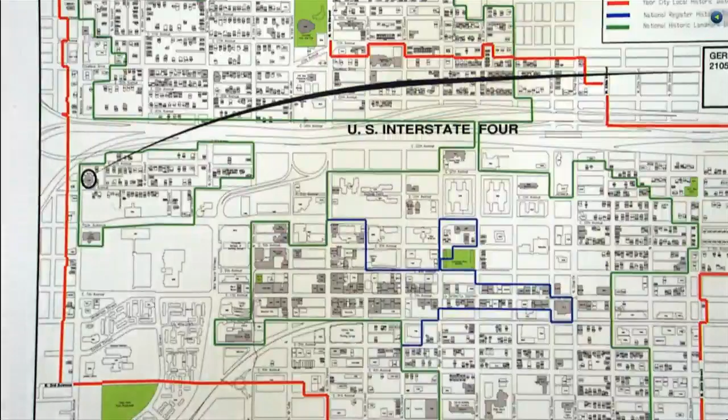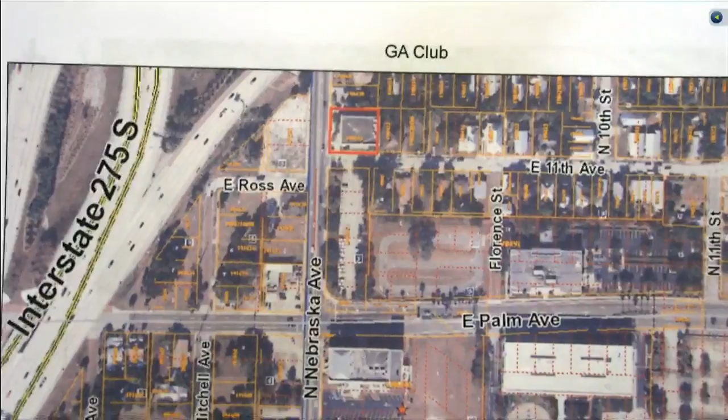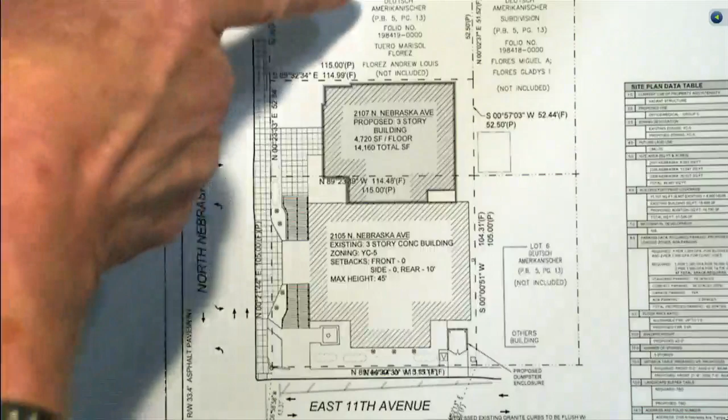And here is the site plan of the building. Here's the historic building, the German-American Club itself, and then here is an addition, which, as Ron mentioned to you, you have reviewed previously and approved. We will be going over the exterior as well as discussing the interior, but I know you all have seen that. To the north of the historic building is an existing parking lot, and then the major parking lot again is to the south of the building.

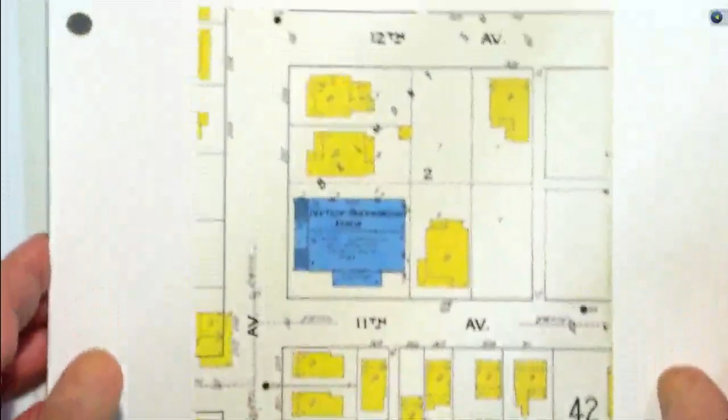So here we have a Sanborn map of the building. The map was prepared in 1915. The building was constructed in 1909 with renovations in about 1942, and then again some renovations were done by TEDCO, the Tampa Economic Development Corporation, in '97 and '98.

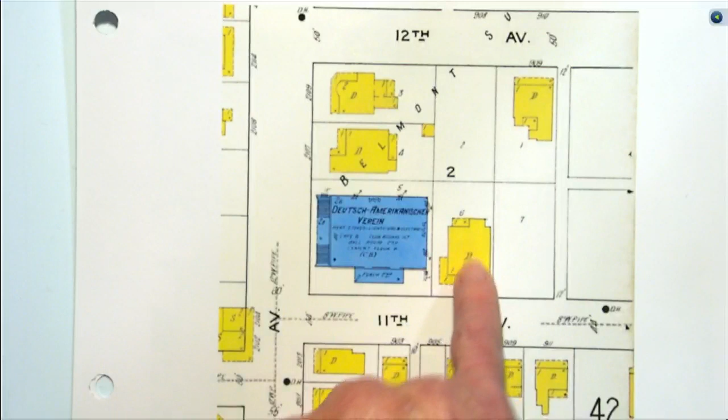In fact, I had my office there when I was an in-house consultant to the city and saw the building before rehabilitation as well as after its 1998 renovation. You'll see there is a cigar workers cottage immediately to its east, and there were historically two buildings to its north which are no longer existing.

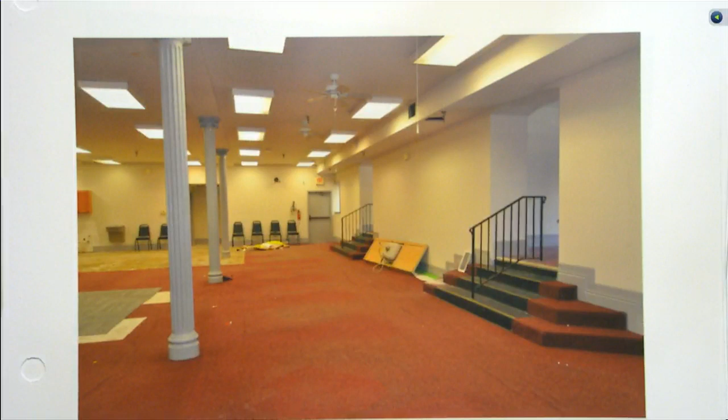Another view, this looking east along the south wall. Again, you'll see those lovely cast iron columns and modern light fixtures - there are no original light fixtures in the building.

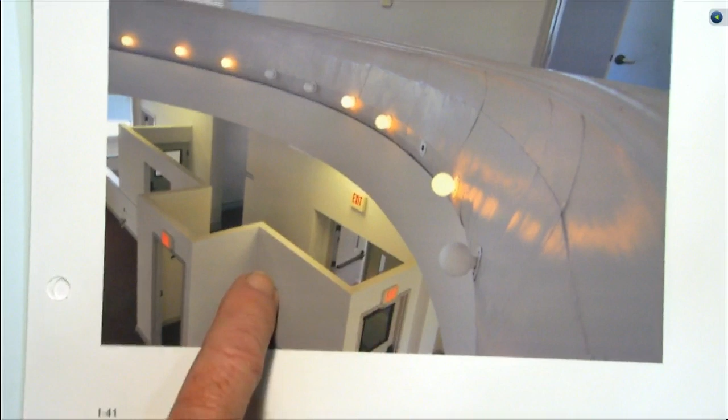And then here we are looking downward towards the front entrance, and again, these partitions were from 1998, and they are to be removed.

So we will move from there to some SketchUp drawings, and then I'll quickly walk you through the elevations as well, and I'll let Margie get to that place.

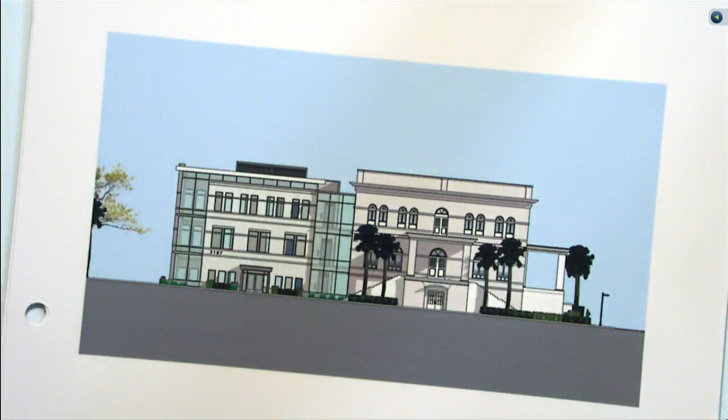I think the SketchUp drawings really show how the addition is to work. I was not part of the design, but I will tell you, I think that it is an excellent design.

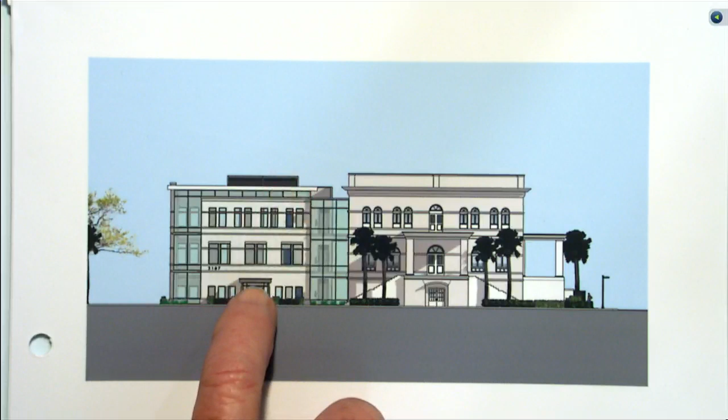I think the architects did a terrific job, and that is because here again, here's the historic building on the right-hand side of the slide. There is a glass hyphen that's set back, that creates distance between the mass of the lower and smaller footprinted addition to the building. So it's, I think, an approach that makes it clear that the addition is new, but it is compatible and sensitive to its context.

Here's a three-dimensional view of that, again showing the inset hyphen, the sort of smooth brick facade with the glazing band to the side and above in a sort of clerestory manner, and then the historic building continuing to shine.

So the things about the historic building that are clearly important, which will be maintained, are the existing modulation of the masonry, the original grand staircases on the east and south, the balcony area, covered balcony area, the cornice and parapet, and almost all of the window openings.

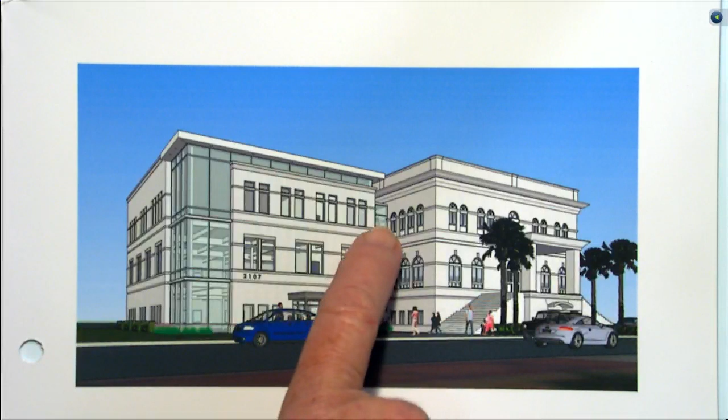And we'll see in plan there are two window openings and one door opening which will connect to the historic building, so two of the original windows will become doors, using the existing width, as a sensitive approach to making this addition work.

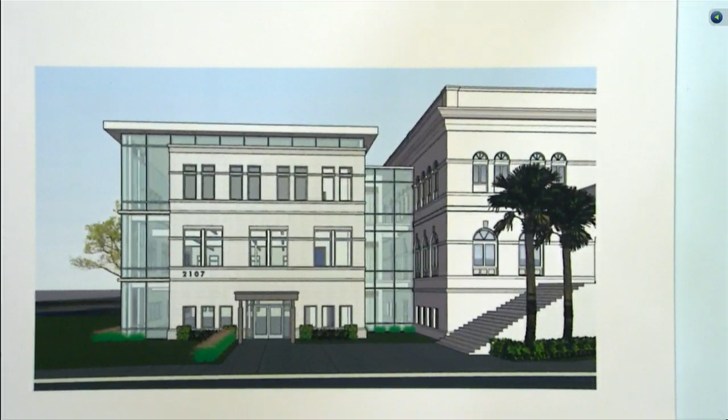So this is a closer view of the addition to the historic building, and you'll see it is very nicely modulated. And then a closer view of the hyphen.

So moving from there to the plans will be next, and I will let Margie, well, I guess I will walk over to those. The pointer is good, great. And I guess do I need a microphone?

So, what we have here, can you hear me or do we need the microphone? Okay, thank you. So what we have here is, on the right, again, is the outline of the historic building.

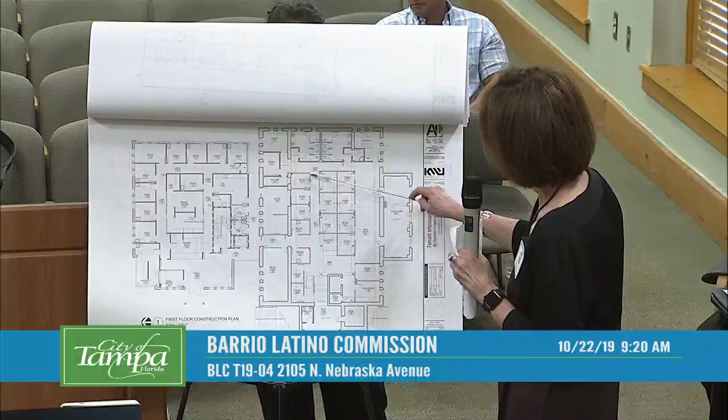This space that you noticed on the first floor level was an open sort of exercise area, and these additional partitions around here existed, and they will continue to exist. There will be new partitions in the center of the space. Each of the columns will again be revealed, because the partitions will be approximately 8 feet of solid drywall finish, painted drywall, and then above that will be glazing.

And then I'll show you a detail of that. And again, here's the hyphen connector to the new building.

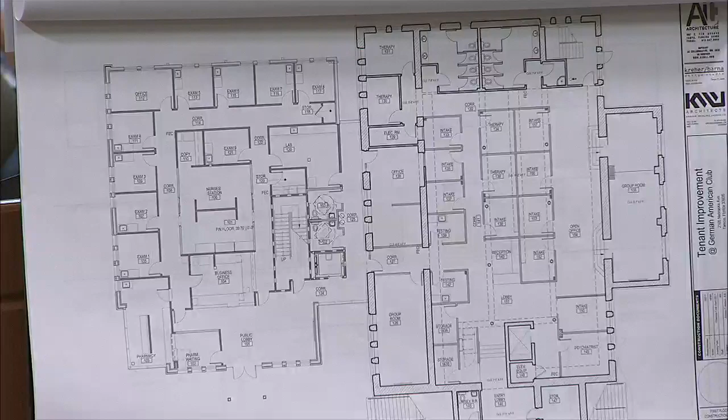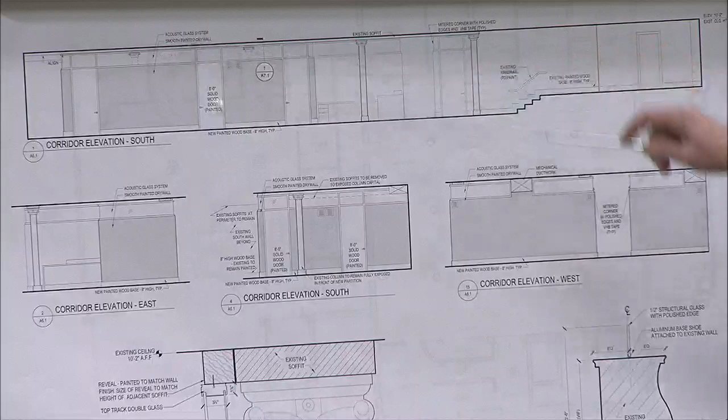Here is an elevation of those partitions. You can see the gray area is solid, and these are doorways into each of the exam rooms or offices. By the way, the proposed new use will be a clinic and health facility, a combination of exam rooms, office and consultation areas, as well as offices for the staff. There will also be a small pharmacy within the building.

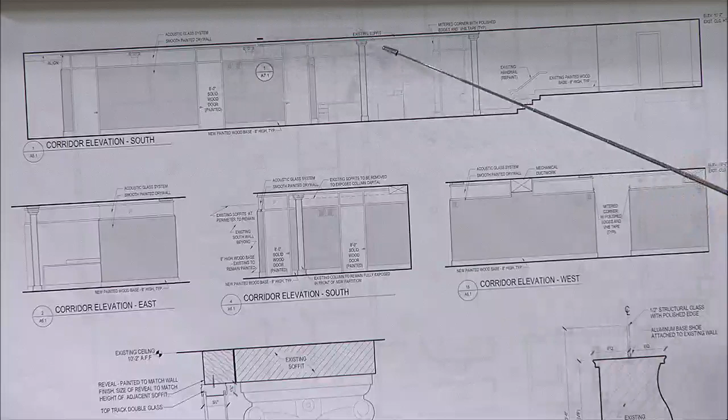This is glazing at the top of the partitioning so that you can see the restored column capitals. Here is a larger detail of that: the column capital, existing soffit, and then new double glazing, since the rooms require privacy.

On the balcony level, this is the existing balcony wall, and there will be a new glazed polished glass rail at the top of that to create the 42-inch height that we require.

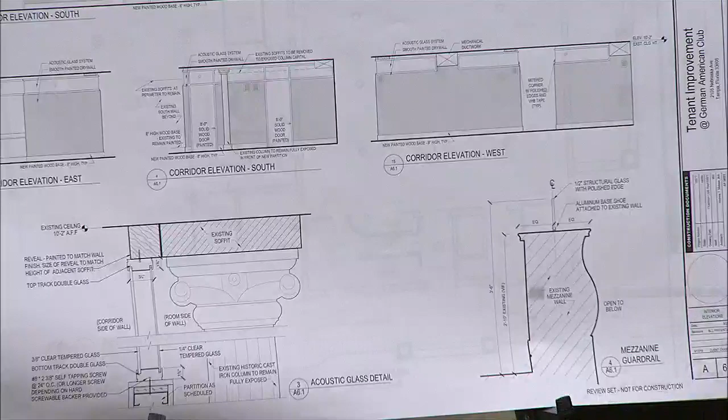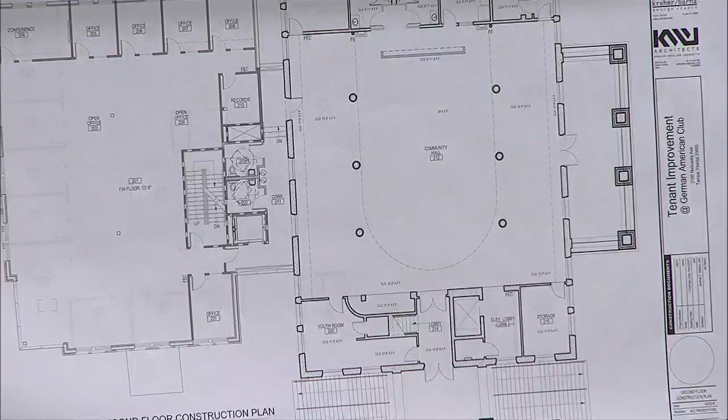Moving to the main level, what's really wonderful about this design is that they will be keeping this as a large open space. Although there are virtually no original finishes, the columns are certainly important, and the volume of the space is a character-defining feature, so this use will actually maintain that. We are pleased to be able to tell you that.

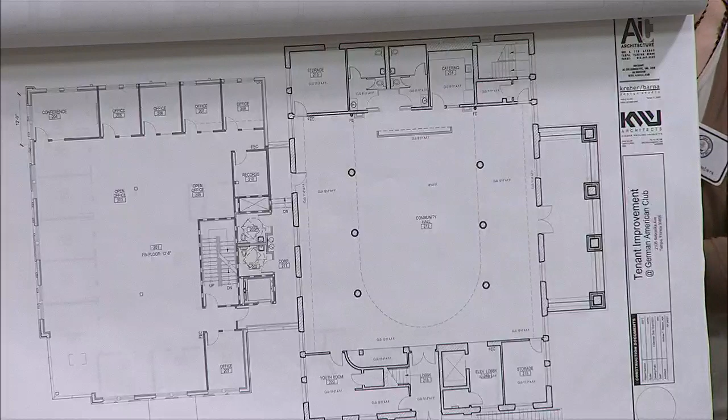This partitioning, most of which was created in 1998, will continue to exist—just the rooms will have new uses. This will be a youth room, this will be storage and catering, and the existing restrooms will be renovated. Then, of course, here's the second floor addition, which will be open office and some private offices as well.

Moving to the third level, also known as the mezzanine or balcony level, that will also be maintained open so you can see the original proscenium arch. The space behind the proscenium arch will remain in use. The stage will not be reopened, but there will be no new partitions there.

This will basically continue to serve as a conference room, and this will be open seating. There may be some open office desks along here, but it will be open, not enclosed. This will be a break room, storage, another break room here, and then offices and an open office area on this top floor.

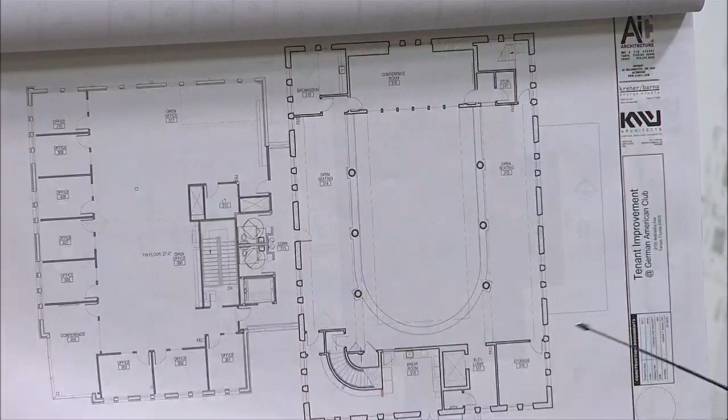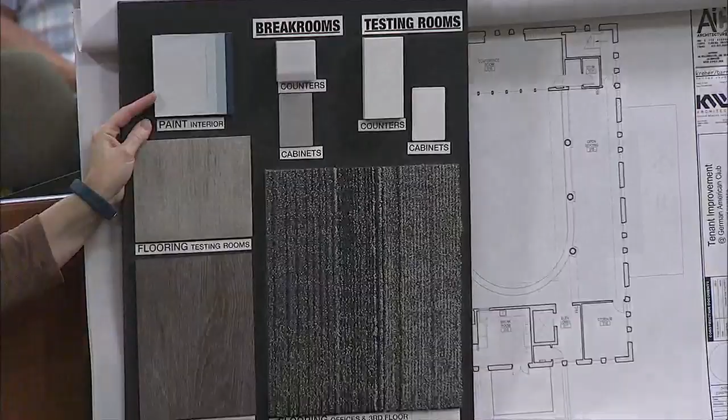Now in terms of finishes—as I've mentioned a few times, there are no original finishes—the new finishes will be contemporary, compatible finishes. I actually know that on the second level and balcony levels, what I see below the carpet at this point is particle board and plywood, because the building was in such poor shape that the wood did not survive in the 1990s.

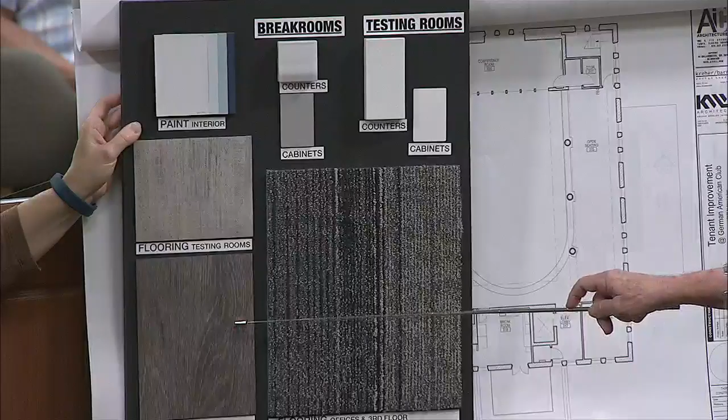So the finishes we see here are break room counters in something like Corian, with plain finish cabinets. Paint colors will range from grays to blue accent walls. The flooring in the testing rooms will be vinyl, as will the floors in any corridors, and the floors in the offices and the third floor are carpet, as in the new building.

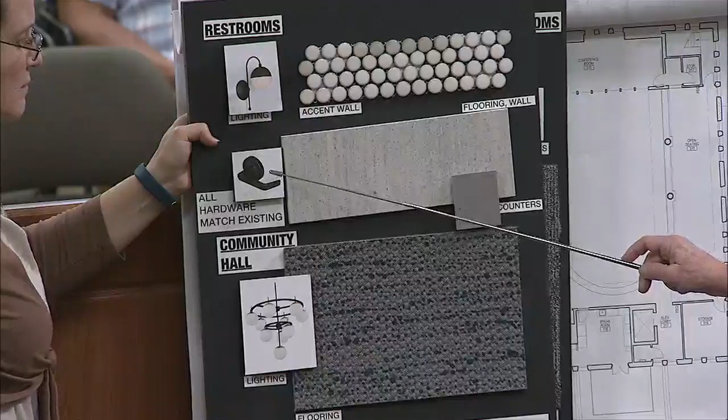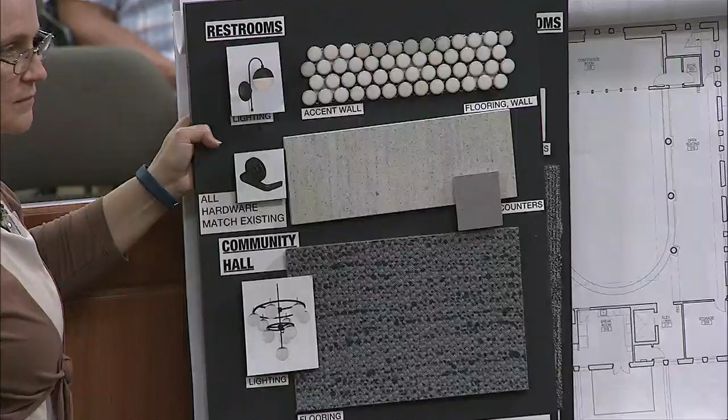This counter finish is a cast stone. There will be some accent walls in the restrooms. These will be the new modern-ish sconces. Hardware will be an oiled bronze look, matching the existing hardware, and these are proposed to replace the 1998 pendants you saw before. So it's a calm combination of neutral colors that will blend with the building—that's the finishes.

We'll move to a couple of wall sections to show you a few things. Here is the roof of the historic building and the roof of the new addition, with the air conditioning units pushed backward away from the front of the building.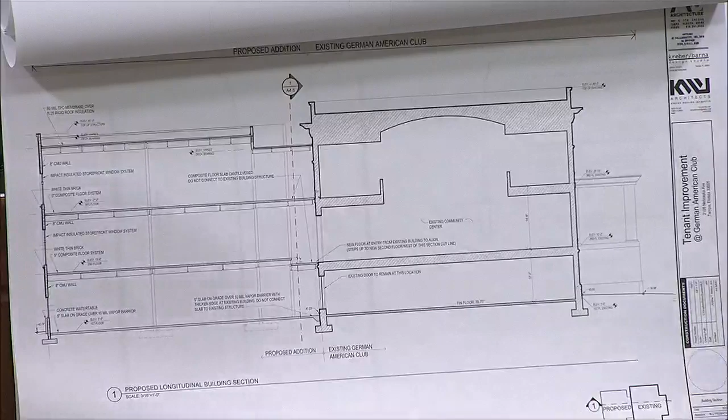And some details of that. The framing will cut around the edge of the building so that it does not cut into the building. The glazing will frame around the historic building, again being sensitive to the original historic fabric. And these are some more details showing the cantilevered structure of the new building.

So I think we have worked our way through all of this, hopefully within our time frame. And we'll be happy to answer questions at the appropriate time.

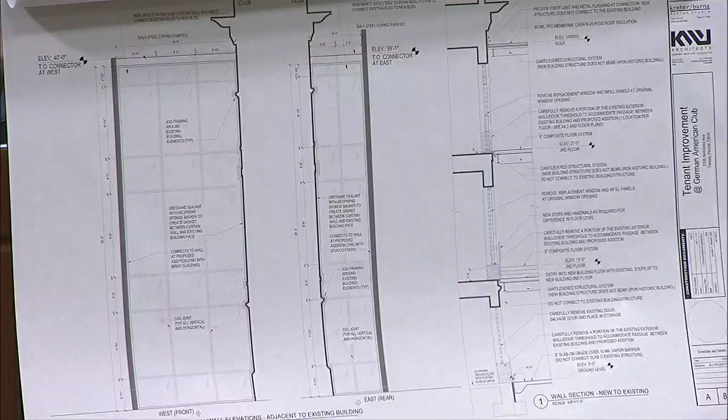Thank you. Good morning, Commissioners. Ron Vila, I'm staff with Historic Preservation. With this complete presentation, staff finds that this is consistent with the Secretary of Interior standards for rehabilitation for Part 1 as presented.

In working with the agent, staff goes out and we try to review, identify, and retain any of the historic fabric that's left behind. A lot of time in these buildings, a lot of the fabric has been removed, so we do the best we can to uncover, as she talked about the capitals, with the drop ceiling that will be exposed, and some of the original elements will be expressed as part of the rehabilitation to meet the Secretary of Interior standards.

So as presented, this is consistent. Just a last minute note as well: in the late 90s, there was a lot of discussion to demo this building. So this is a win for preservation. Not only did we save the historic structure, but put it back into the fabric of the area, and added onto it. So it's going to be a catalyst for that corridor.

I'll be here to answer any questions. Thank you.

We have the opportunity for public comment. Is anybody here to speak for or against this case?

Okay, so we'll start with commissioners asking questions. I have no questions, thank you. No questions as well. I have questions.

Okay, the slide that we're on with the glazing, the way it comes in and around the building, I would just ask you to double check what was approved. I don't recall, because I know we went a couple different meetings into how that building connected. I just had an opportunity to go to Virginia and thought of this project because of the addition, the modern addition of the library to the existing library in Norfolk, and they incised the glazing into the wall. So there's a couple different takes. I'd ask you to double check with Ron, to make sure that what that detail is matches what was approved, if we specified. I don't recall off the top of my head.

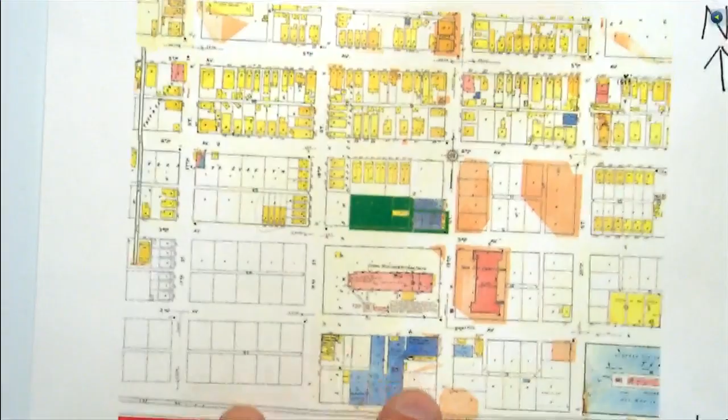At this time, I'd like to go through the photo presentation. This is a Sanborn map from 1929. The property in question is here in the shaded green area. If you look on the corner of 19th Street and 3rd Avenue, you have what's indicated in blue, which indicates it's a masonry construction building. It's on the corner with a balcony that flanks the eastern elevation, and then the addition will take place on the empty parcel to the west.

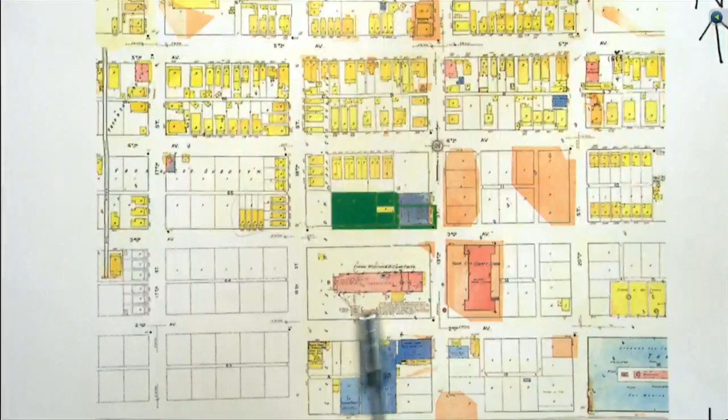Moving to what we'll call the front elevation, or the front facade off of 19th Street. The existing condition is a 2-story structure with an elaborate cornice that wraps around, and I have some details of that. This is moving to the south elevation. You see the series of solids and voids with a belt course. And moving to the rear of the property, which will encompass the addition.

This is looking at the empty parcel to the west. Just moving to the features on the building so you get a little more familiar with the condition and some of the materials, you see the masonry units in place here. You see the proportions of the windows, although these are not the original windows. The proportions were respected, and then you have the sill below.

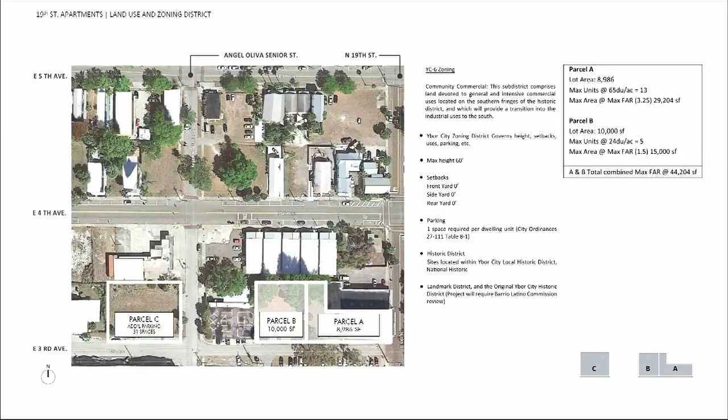We are requesting to rehabilitate the existing structure. It's a two-story masonry building. It will house a total of 10 units, and the total project will have 36 units, so 10 of them will be in the existing building. The rest would be on the new structure.

The new structure is being placed on the site such that it looks as a separate building with a very small connector at the rear, trying to stay consistent with the design guidelines of the district and also with the Secretary of Interior standards for rehabilitation. We have decided also not to add to the existing structure as well. So you'll see this as we go through the slides.

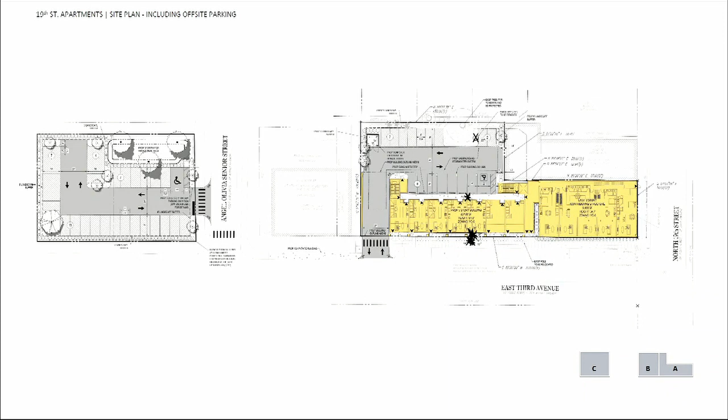We do have obviously space constraints, as you know we were discussing two weeks ago, so on site we're only able to fit 17 parking spaces. As you see, we also have a grand oak at the rear that we are proposing to save as well. To supplement the parking spaces, we have a lot which is roughly within 500 linear feet from the site, which will house the rest of the parking spaces. I believe we will have a total of 48 parking spaces.

We're currently in process—we've already submitted for an alternative design exception, so that's currently in process. As Ron said, we are requesting today preliminary approval, so this is kind of a complex project with a lot of moving parts. This is phase one of that.

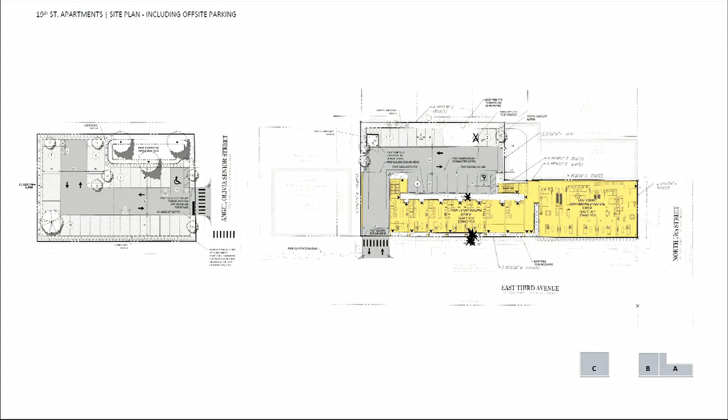The second variance that we removed was the one foot that we were requesting at the rear. We were able to eliminate that by working with our civil engineer. We're going to be doing some regrading at the rear, which allowed us to eliminate the steps going into the units, which gave us the extra foot that we needed.

So this is the existing building, as you've seen. We're going to remove the fire escape as it's not needed and doesn't meet code, and is truly a hazard. We're proposing to refurbish the balcony system. Now, this is not the original balcony—I believe the original balcony was a wood structure. This was done at some point to respect that original balcony, so we do want to refurbish and enhance this balcony.

There are some challenges. We're going to go through the encroachment process after this, depending on the outcome of this meeting, as well as the cornice detail, which will also have to be approved through the encroachment process. So we do have to go through that for this building. And there's a small component on the new building, which is the entry canopy, which will also have to be part of that application, which you'll see in later slides here.

We're going to be repairing and painting the exterior masonry. We're going to be adding and recovering the storefront system.

Luckily, the building north of this one, abutting it, we believe was done around the same time, so we have a good precedent of what the storefront used to look like here. We're kind of mimicking that and respecting that architecture and design.

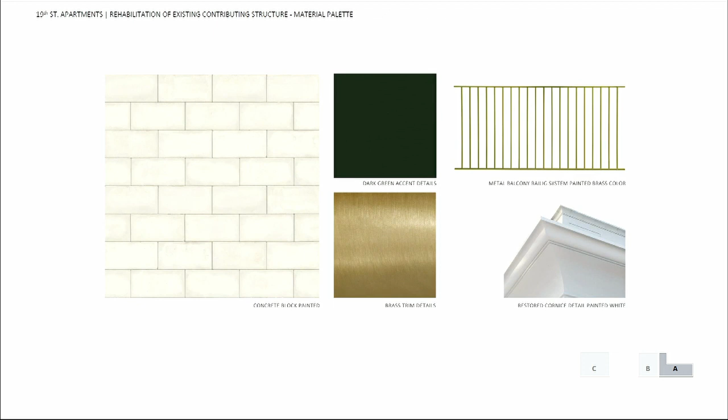This is the materiality of this building. Again, we're going to keep it pretty much as it is now, a light beige color. This is consistent with Ybor City's approved finishes, and we've worked through this palette with your staff.

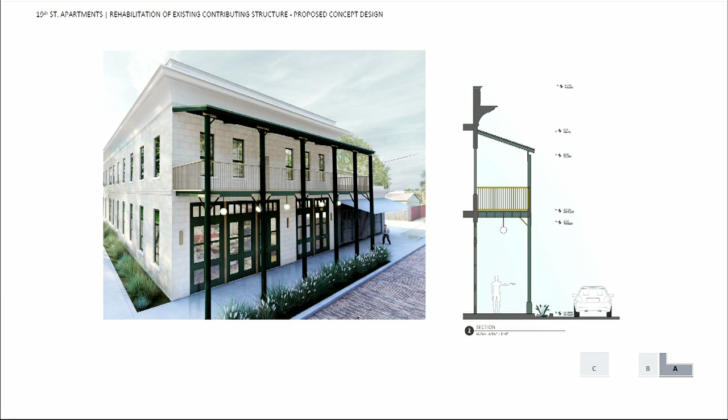It's also important to note that we were given a grant through the Hillsborough County Challenge Grant. We've already gone through this presentation with them, and they've granted us some funding to help with the rehabilitation of this structure.

For the design of the new building, we looked at references in the Ybor City area. Obviously the most important reference was the building across the street, the Corral cigar factory. We drew from this building the materiality and the rhythm of the windows. We also looked at the Philip Shore School, at how the stucco apron was included, combined with the brick as well.

Also along 7th Avenue, we looked at the variation of materiality between the 1st and 2nd floor, and how that helps break the building scale.

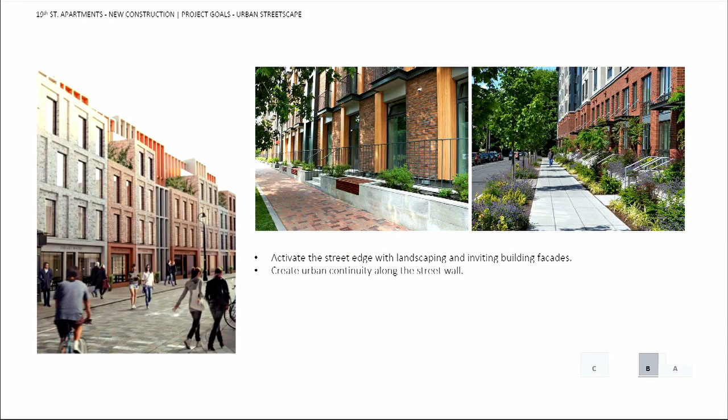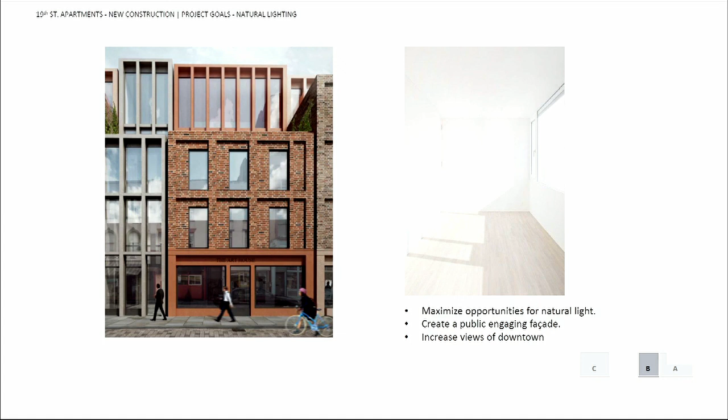We also looked at some additional goals we wanted to accomplish for the project. We want to activate the street edge with landscaping and create an inviting facade, and create more urban continuity, especially on the south side of the district. We want to maximize the opportunity for natural lighting within the structure and create opportunities for views to the district and to downtown.

We also want to focus on creating some rooftop areas, since the new building we're proposing would be a 5-story structure, so I think there are some really great opportunities there for rooftop spaces.

This is the south facade of the building, which is really the main facade for the new structure. To the east is where the building connects to the existing structure, and to the west is the entrance to the parking lot, which is hidden and masked by the building itself.

We thought, and we've touched lightly on this in the past, that it was really important to have units directly engaging with the streetscape, just to have a more vibrant street life.

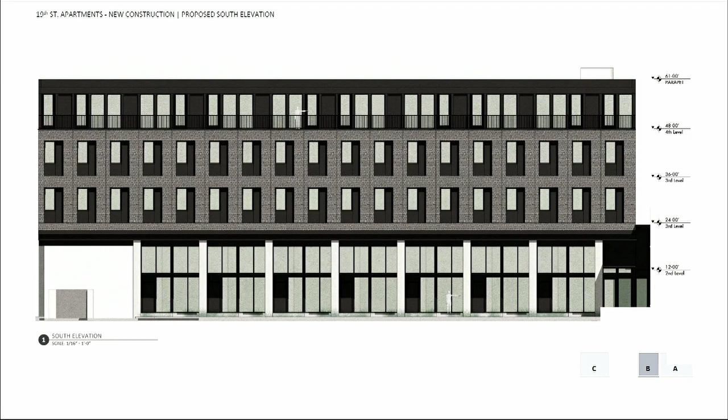As you can see, as you move up, we have the brick in the center of the building, and at the top floor we break the materiality again and set that structure back so the building doesn't seem higher than the Corral building itself.

This is the rear facade, facing north. Here we're just showing part of our design process, drawing inspiration from the Corral again, following the rhythm and scale to make sure we were respectful of that as well.

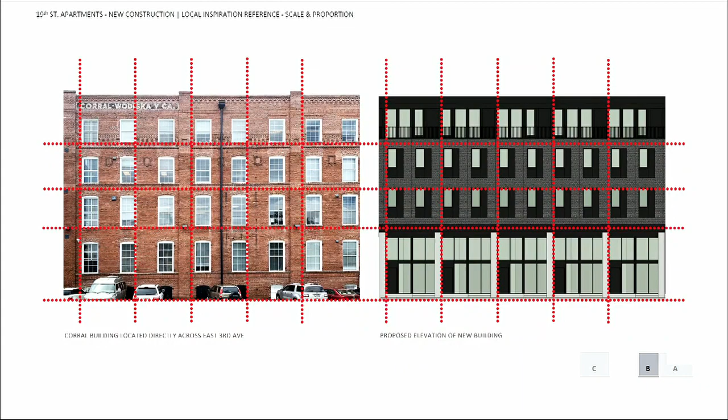You can see here in the axonometric section just the complexity of the building. You see how the lofts engage to the street, how the parking is. We're using the parking at the rear and cantilevering the building over it, and you're able to see how we're proposing to step back that 5th floor.

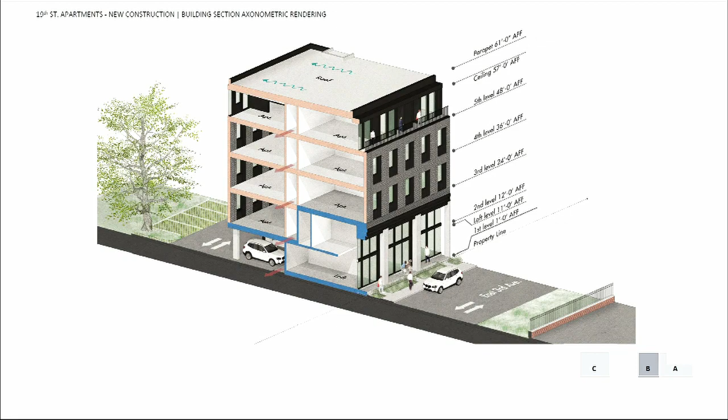We're playing with the window fenestration again to stay consistent with the rhythm of some of the references we showed earlier. And here you can see what this addition starts to look like in relationship to the street on 3rd, and in relationship to its existing context.

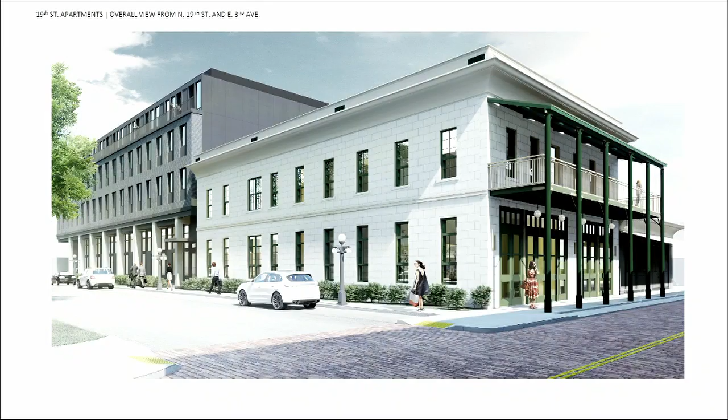In this rendering, you can see how the building relates to the existing 2-story structure. We are drawing from this existing structure, and as we move forward, we are trying to respect some of the original lines from the historical structure here.

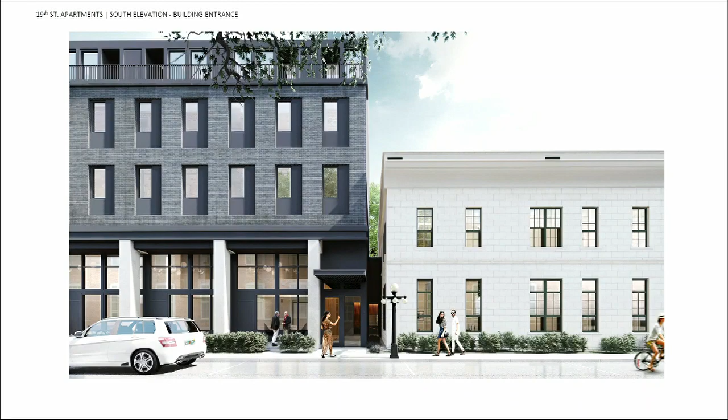And then this is where the two buildings meet. As you see, there's this slight separation, and the connection is set back. We've worked with your staff, and we're able to come up with design details that relate to the building next to it and the building across.

With most of the development happening along 7th Avenue and north of Ybor City, we believe that this is really a pivotal project for the revitalization of the south side of the district. So with that concludes my presentation, and I'll be happy to answer any questions. Thank you.

Good morning, Commissioners. Ron Vila, staff with Historic Preservation.

Staff finds that this application is consistent for preliminary approval with the Ybor City Design Guidelines and the Secretary of Interior standards. On page 3 of the staff report, we have the application of standards discussing the Ybor City Design Guidelines. For preliminary approval, under those bullet items, he's provided the height, the width, the facade width, the setback, the spacing, and the alignment. All that was indicated on his site plan and the illustrations provided.

Moving to the Secretary of Interior standards, starting on page 3 as well. There is a contributing structure on site. The contributing structure shall be preserved and retained. It also discusses that removal of historic materials or alterations of historic features shall be avoided, and the elimination of those features shall be avoided. The distinct features, finishes, construction techniques, and examples of craftsmanship shall be preserved.

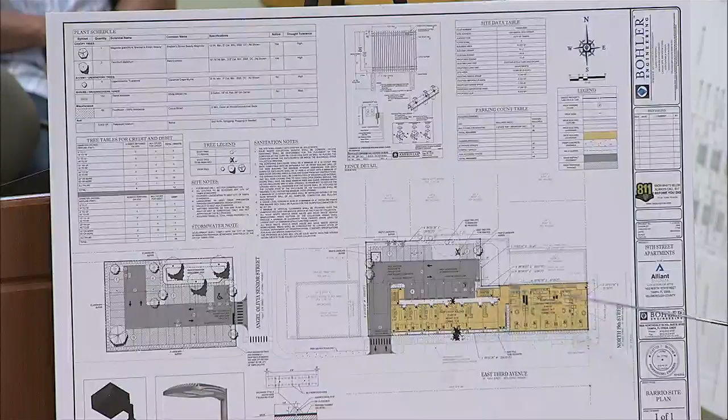We're still working through some final details, of course — we're asking for preliminary approval. At the rear, it'd just be a small hallway connection. This is 2 stories, so right now we're exploring an option where the second floor of this building is only dedicated to the loft units, because the second floor of the existing structure is actually very high, almost a 2-story high space, so it wouldn't really match. It would be hard to connect these two buildings.

We'll have to ramp within the second floor, so right now we're exploring keeping the second floor of this dedicated to the loft units, with stairs as access. So really the new building would begin at the third floor, and this connection would only be needed for the ground level, since this building will have 2 means of egress on its own. Actually, I take that back — the elevator would be here, connected to the second floor only of this building, but not to this one, since we have the loft units at the ground level.

For the final presentation, we'll have floor plans and sections specifically of these connections — I know how important that is, especially for utilization of the building. I was also curious how the materiality shifts from the existing to the new. This connection is mostly going to be glass, combined with some black trim, part of our material palette. We don't want to celebrate that connection — instead we want to hide it, so the buildings really do seem like two separate structures.

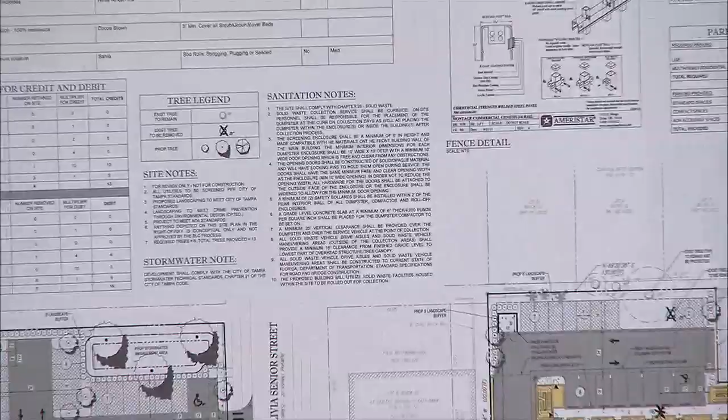Yeah, we've worked through this. Stormwater is going to have to be treated underground, and we've preliminarily started laying out some of the landscaping requirements. The species will be finalized at the final presentation, but we've worked through that. We know we have to keep the grand oak, so on the site plan we've provided a plant schedule, which we did after the staff report was submitted. I think we've addressed most of their concerns, but some things will naturally get resolved as we move to the final part of this project.

And then solid waste as well, how is that? Yes, so the solid waste will have to be a rollout dumpster. This would be where it would live, and there will be staff that would have to roll the dumpster out whenever the scheduled dates are.

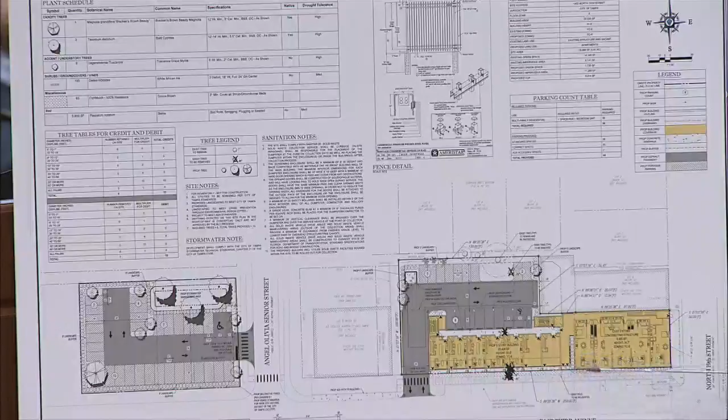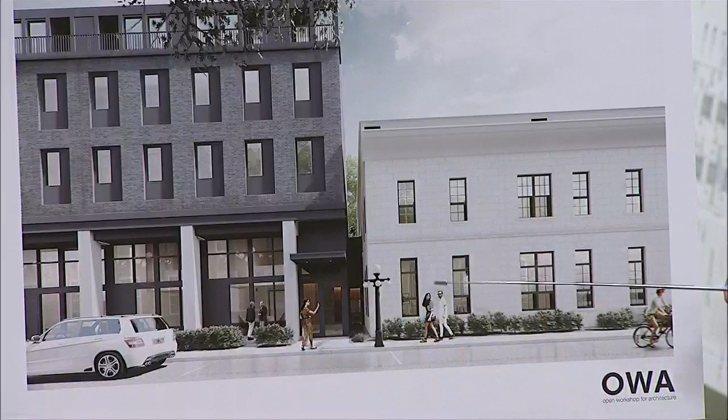And then what encroachments are there on the site that you may be concerned about? We haven't submitted the application for the encroachment yet. We wanted to go through this presentation first and see what some of your comments were before we went that path. I know it's going to be a difficult path, but our main challenges are the existing structure, and then we have this canopy here at the entrance of the building, which will obviously encroach as well. But that process really, depending on the results of today's hearing, we would start as soon as possible.

Fantastic. Just as a final question and comment, I've liked overall what you've done so far, and from the previous presentation two weeks ago, you've made a lot of great compromises that have made the project better, without the variances and other things we've had to deal with. I'm curious if you showed the rhythm and spacing of the building, the windows, and how you've taken the context into it. I was wondering if there's anything you used, like the existing cornice on the historic building, or the way their columns are laid out, which seem very important to the historic building, and how you've implemented that in the new building.

Yeah, so this was a really intricate cornice detail. We looked at that, and for the existing building it actually complements it very well. We were concerned—in fact we actually started with smaller trim details in these areas, and we've increased them, which helped the building. It's helped reduce the scale as well, in kind of a strange way. We looked at that, and we didn't feel like this architecture related directly to the new architecture, but we're still being respectful of how important that is. So we've included, obviously, one here and one at the top, pretty much where there's a change of materiality.

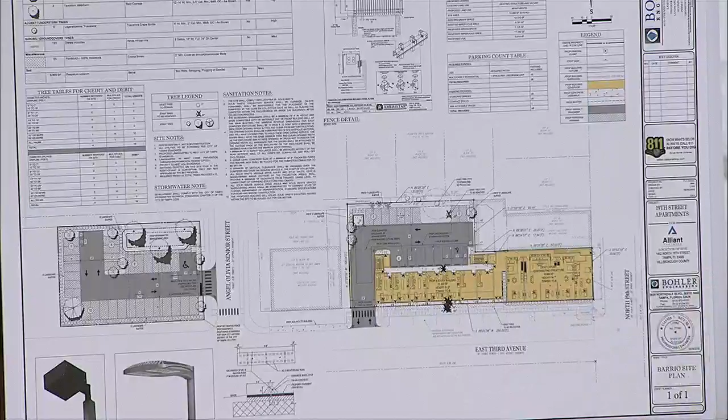There was a discussion about doing a gate at the entrance of the building. That hasn't really been fully explored yet, just the feasibility of doing that. But there's still an option of creating kind of a gated entrance to the building, with detailing that will match the guardrail details as well. So the next time we see it, you'll have had the opportunity to determine if you want to do that and present it.

Mechanical units, are those rooftop mounted, you figure? Yes, so we have a lot of opportunity for locations for rooftop, especially on the existing building. It has a really deep parapet, so we think that's a great location because it would be not visible pretty much from anywhere, not even from the building across, unless you're on the roof.

To serve the whole project or just that? No, it would be for the whole project. So I would say next time we see it, let's see a roof plan of that, to make sure that we're all on the same page regarding what we're going to get there.

Material palette, you've heard some questions and comments about colors in the existing renovation as well as the new project. I would recommend you keep looking at those and see what the options are. I understand the desire to compare and contrast the old and the new, but you're making reference to larger scale buildings that are adjacent to it, so I think it's important to take those into consideration. I'm sure you are, but that kind of brings me to one of my comments.

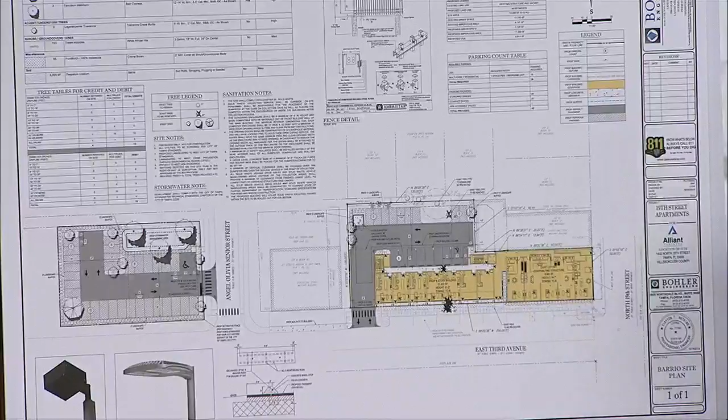We have an image of the west facade of the existing building, but it's not currently showing the portion of the new building in the back. I think if you put up the rendering along that south side you had, this one is probably the one that shows it the most. Okay, we'll talk about this one, showing it the most.

Your columns that you have in front of your residential units on the new building are kind of staggered, where you get that little hiccup where the buildings are going to touch, which is fine.

And then you get to the west facade and you go 1, 2, 2, 2, 2, 2, 2, then 3 for the bay spacing there at the end, and there's no west wall that we can discern.

I have no idea. It's a great perspective that you're showing here, really interesting and exciting, but what is it going to look like from the other side? It's a big blank wall that we have no idea what it is.

And even on this facade here, where you see the brick, you see the brick as a texture. It's really kind of applied to the face. It's the depth of the sunshade that you want, and there's no tie back in and along.

So I would challenge you, between this visit and next time we see you, to figure out how these bands wrap around, even if they're implied. That top band, you have the opportunity to inset at least a reveal and bring this around and across the same way that all these other buildings that you're referencing do.

And I think that would, even if you're not going to put windows there, help you tie all the facades together. And I think you might find there's some places where some stuff doesn't quite work.

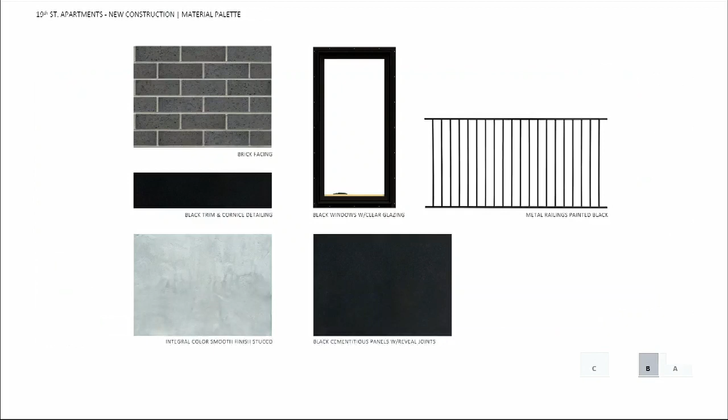Okay, so I don't know if I can - well, I guess I can't point there, but at the top there on the west facade.

So we're gonna keep - there's 4 windows which we're gonna keep, and then there's currently 1 door, I believe, that we may have to relocate just based on how the units lay out. We want to make sure that at least one of the units has access to the balcony, and then there's also a public access to the balcony space as well.

The second access at the top is going to be following the same rhythm of those windows. The final location is yet to be determined, but it'll kind of follow that same pattern of the windows at the top.

Okay, thank you. While we're on that elevation, one quick question, because there's residential space behind the storefronts. How do you propose treating the glass? Because the guidelines are very clear that the glass has to be clear in a storefront situation.

Yeah, so it'll be the clearest glass we can get, impact rated, that meets the energy efficiency code, and in terms of how the unit is going to navigate the privacy of that, it's probably going to have to do with either curtains or shades specifically for that door.

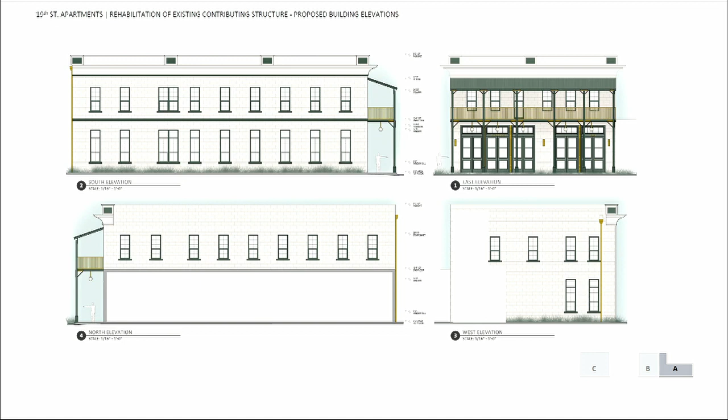No, I'd just like to say that all of your comments are obviously very important, and this is a big project. It's a complex project, and we've actually in our office talked about different options, and we haven't had the opportunity to explore all of them. Again, this is a large project, and as we keep designing and working with you and your staff, we keep seeing new things and areas that need more attention.

The intent for the next phase would be to engage a full team of consultants that will help us get the project to a more finished, detailed schematic design version, so that we can present you more details.

Thank you. All right. Okay, well, we'll close the public hearing. And before you close...

Just one comment, Mr. Chairman, you had asked about the design exception application. That is an application that's approved administratively by staff. What I will do between now and the next meeting is consult with staff and confirm the extent to which that application interplays with this application, and what this commission's authority would be with respect to that. I will research that further.

Thank you. Yeah, I think that we would just want to make sure that, if it needs to be attached to the project, it has been successfully completed and is in place before we grant final approval. Understood. Thank you.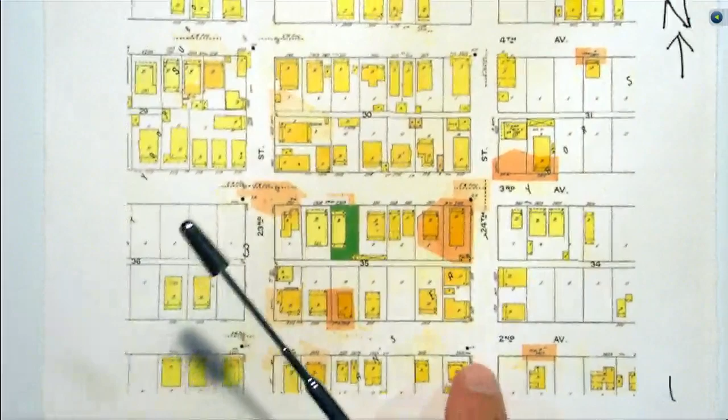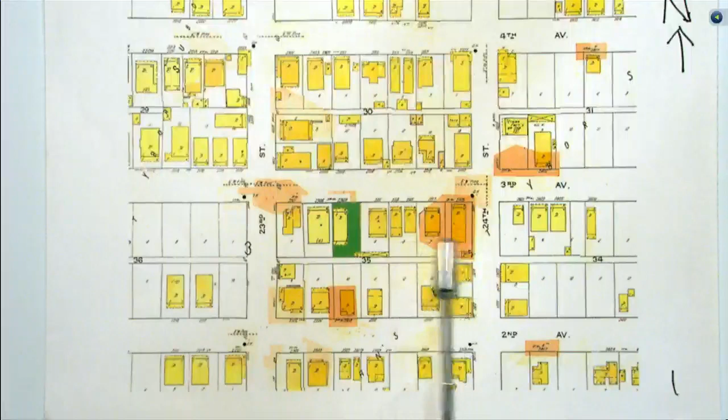Just walking you through the site one more time. We have a different image. This is showing the fabric in 1929. This is on 3rd Avenue, seems to be a popular street this morning. In between 23rd and 24th Street, highlighted in green, is the parcel. You see the fabric, as I talked about. We just saw on 3rd Avenue the cigar factory that was there in proximity to this location. So the housing stock in yellow indicates that these are all frame construction casitas that were a big proponent of the cigar industry, and a lot of the workers would live in the immediate vicinity and just walk back and forth to work.

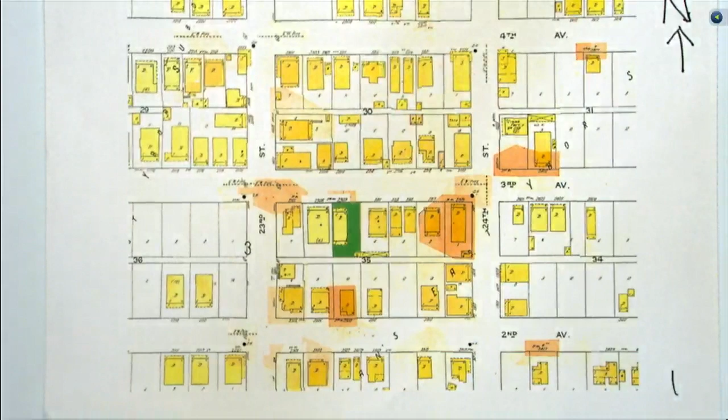Good morning, everyone. Good to see you again. My name's Kevin McGinnis. I am the owner and the presenter today of this project on 2309 East 3rd Avenue. I hopefully addressed many of the issues that you brought up, so I'll just kind of dive into that.

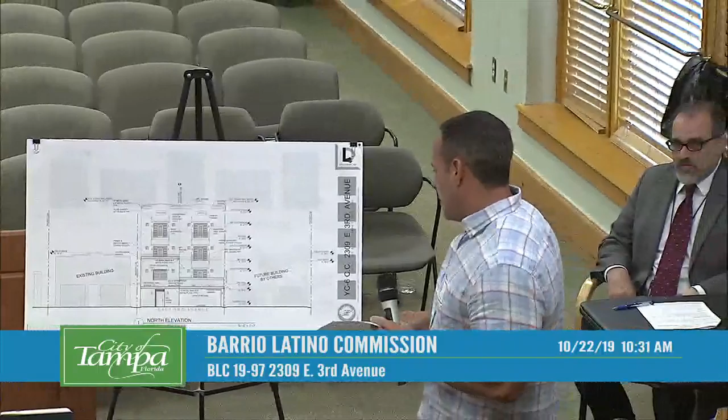On the front elevation, we talked about the notch by the garage. So that has been moved over, so all of these lines line up here from the second and the upper floors there. This is what it previously looked like, just so you can see the difference there. All the red lines are the ones that we've made the adjustments on.

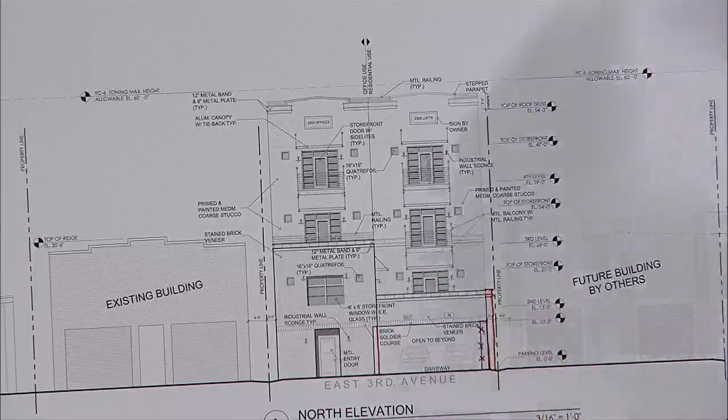Okay, the next issue. We're making a note to the AV department. We're missing screens up here, so that makes it more difficult. Okay, can I go to the next slide? Yeah, please.

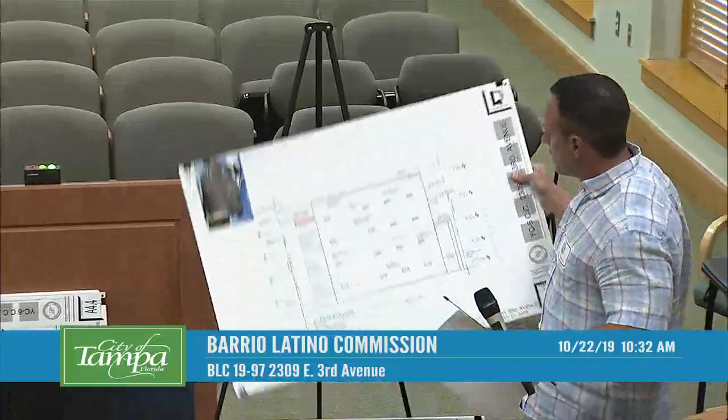The next issue was kind of the continuation of the brick along the sides. As you can see on this elevation, the brick ended right here. And then the adjustment that we made was the continuation, obviously, of the brick until the stucco started there. I'll show the other elevation concerning the brick as well.

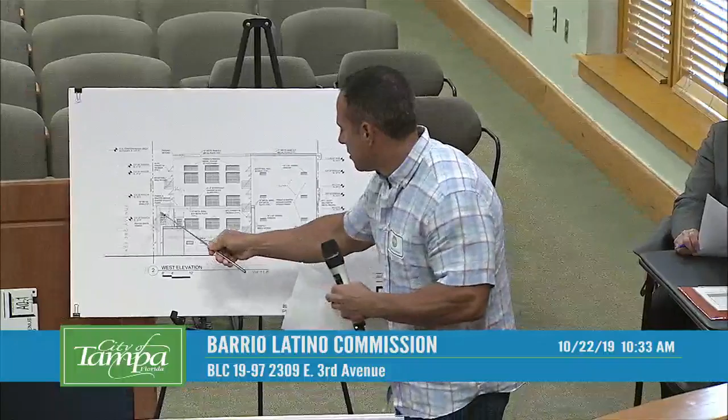So the west elevation here, the brick ended right here, and then we continued it to where the building started there as well, as you can see right here.

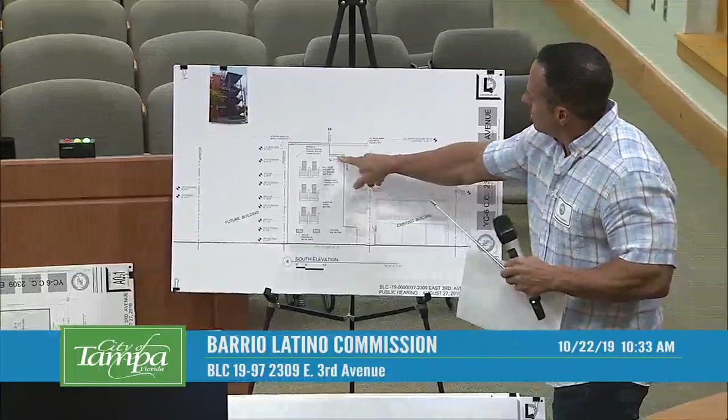The third issue was the staircase, which we added a roof onto. This is what we had previously, as you can see, the red lines there. I don't know if you can see this or not, but this is what it will look like. The picture up there, I can put it up there if you need me to. And then this is now where the roof is here at an angle.

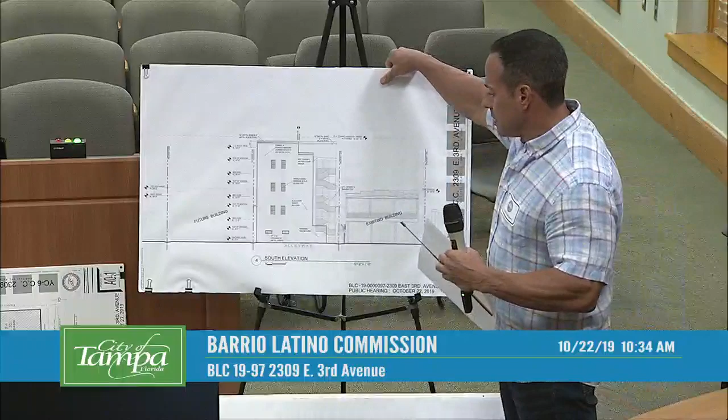I also have that in some of the other elevations if you'd like to see those. Okay, you can see the roof here as well on the east elevation.

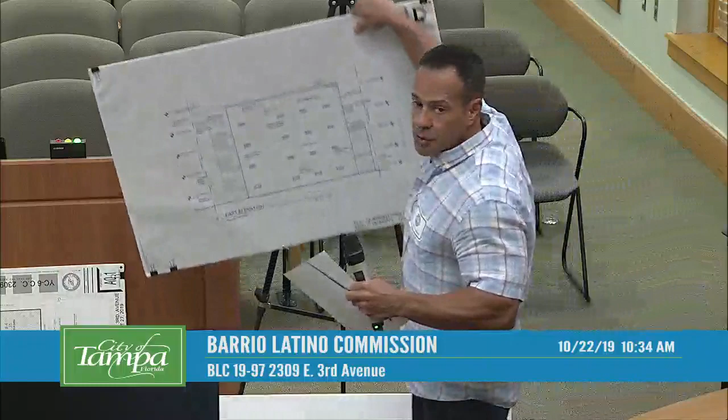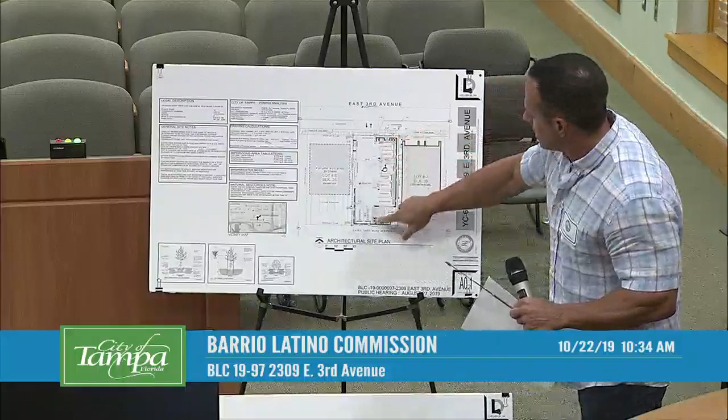Let's see, all the compressors are on the roof now. All of them are on the rear of the building, away from the street. I'll pull up here. This is where they were previously, and now they're all on the roof. I don't have an aerial view of the roof, but they're all on the rear of the roof there. So there's no more on the bottom floor.

And I believe that was all the issues that we had. So if you have any questions about any of those, I'd love to answer them. Thank you.

Commissioners, Ron Vila, staff with Historic Preservation. This application is complete now. He addressed all the concerns from preliminary approval, and he's in for final.